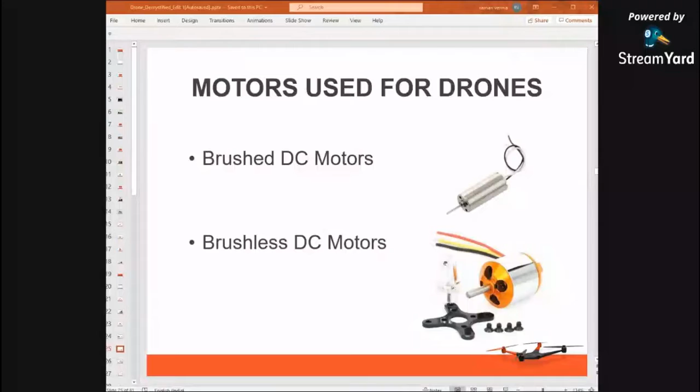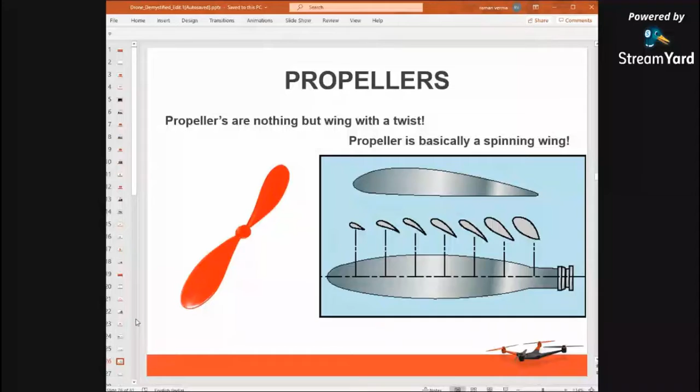Now we come to the propellers. Propellers are like a wing with a twist. Also, when we talk about the propellers, we have two numbers, for example, 5 cross 3. Most propeller diameters are described in inches. So when I say a 5 cross 3 propeller, that means 5 inches is the diameter of the propeller and 3 inches is the pitch of the propeller. So we have different propellers, foldable propellers as well as carbon fiber propellers.

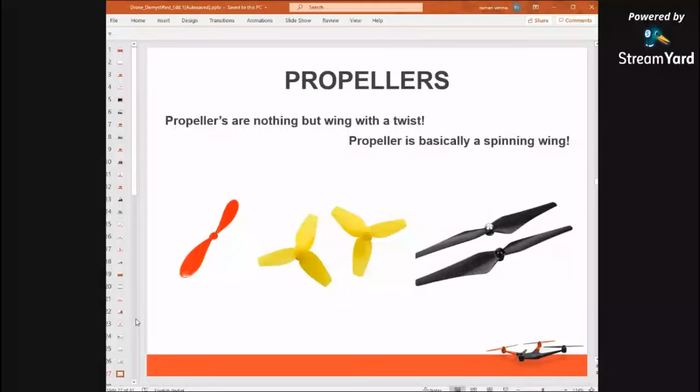Now we want to fly at a different altitude, different speed. So we need to control the motor RPM accordingly. That is taken care of by the electronic speed controller. Our brushless motors are basically an AC motor, and the electronic speed controller takes in the PWM signal and converts it into the necessary current for the motor to alter its RPM.

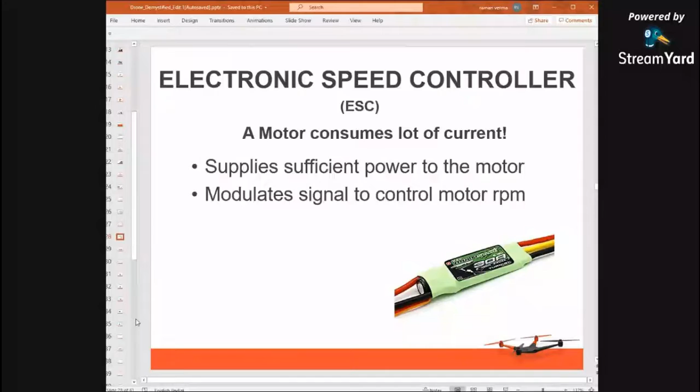Now we come to the powerhouse, the battery of the drone. The most common batteries that we use are the lithium polymer batteries because they can provide a higher discharge rating. The discharge rating of a lithium polymer battery varies from 20 C to a maximum of 120 or 150 C. The racing batteries reach up to 150 C of discharge.

If you want to fly for a longer duration of time, a new way of increasing the endurance is by increasing the voltage. If you increase the voltage, you can drop the current, and then you can use lithium ion batteries which have a low discharge rating.

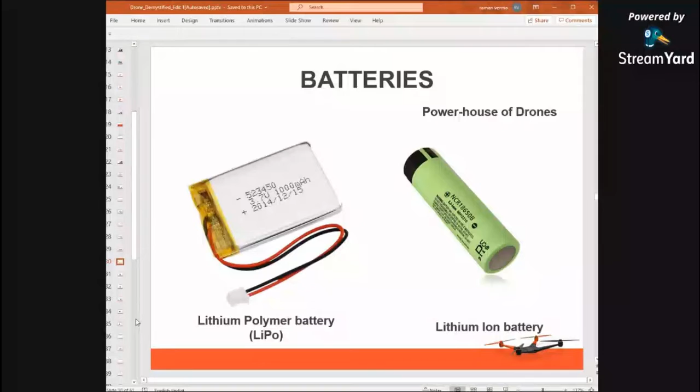Apart from the batteries, another latest introduction to the power system is the use of generators. Batteries cannot provide power equivalent to that of a generator. A generator is a small device that is mounted on the drone to give continuous power by converting the mechanical motion of an engine using a dynamo. Generators are used to increase the endurance for up to 3 hours. It has been shown significantly.

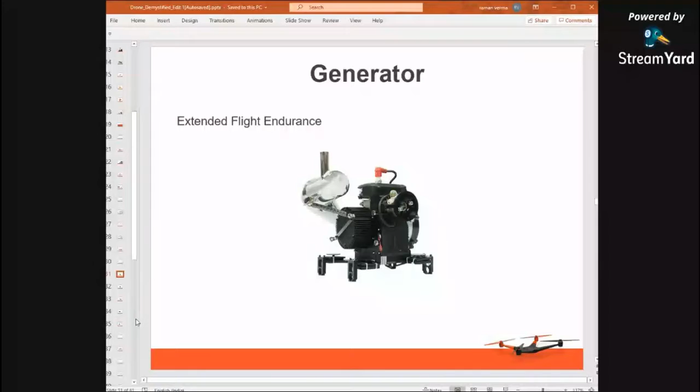A very latest introduction is the use of hydrogen fuel cells for drones, because the emission is totally clean and hydrogen you can produce at a much faster rate. Even at IIT Bombay, we are working on a similar prototype. You would have seen hydrogen fuel cell powered cars, and soon there will be hydrogen fuel cell powered air taxis.

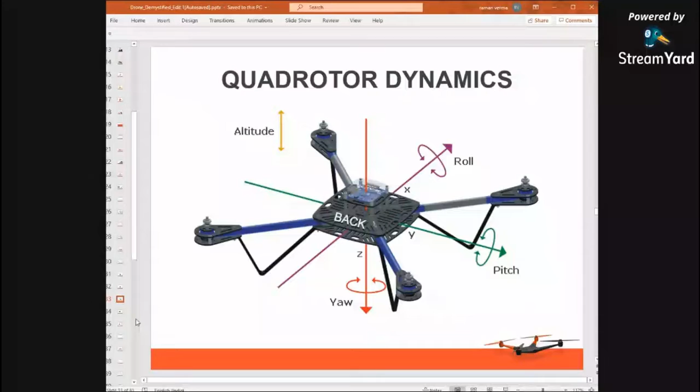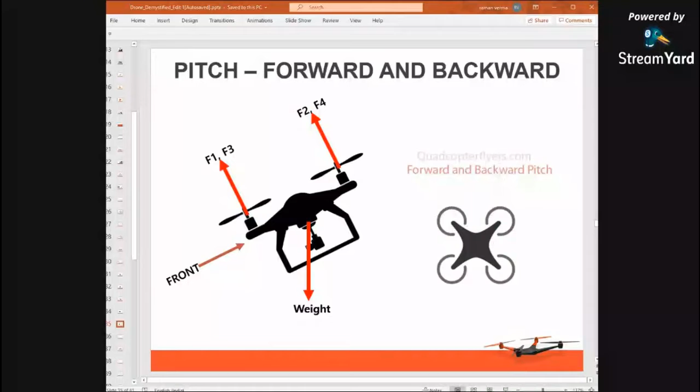Now, when we come to the quadcopter dynamics, we need to understand in an X configuration what is the roll, what is the yaw, and what is the pitch. Are you able to see the drone? This is the front side of the drone. So this is roll. This is pitch. And this is yaw.

Now, when you want to do a roll, basically you give the roll command on a joystick, on your radio. You get that signal, and the flight controller makes the changes. What changes? You increase the RPM of these two motors, so it will roll like this, and you decrease the RPM of these two motors by the same amount, so it will roll towards the right, and vice versa towards the left.

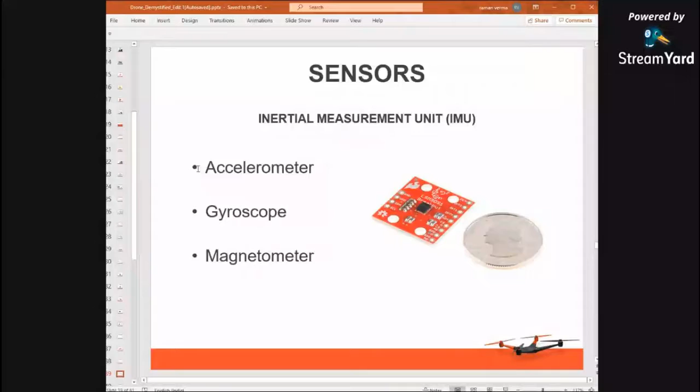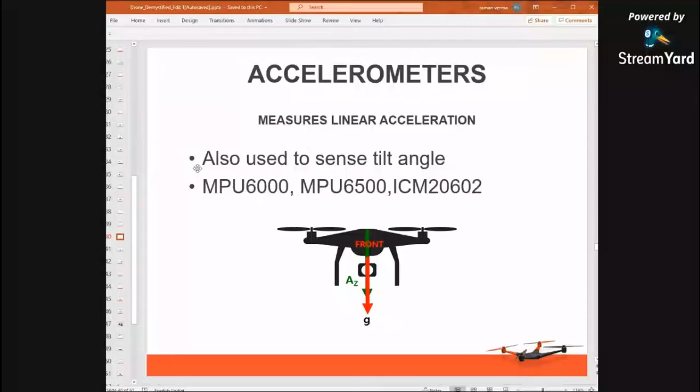Accelerometers are used to sense the tilt angle. The most common accelerometer and gyro chips are the MPU 6000, MPU 6500, and ICM 20602. A gyro measures angular velocity, and a magnetometer senses the drone orientation. A mag is generally used in waypoint navigation, where you want to know the orientation of the drone.

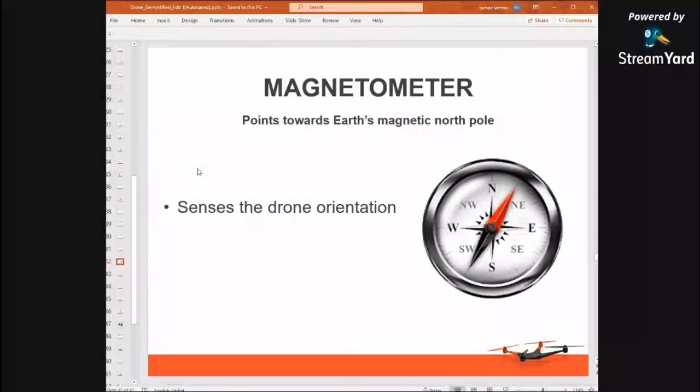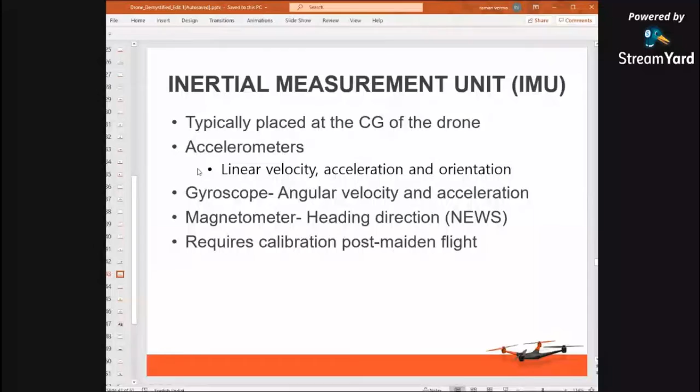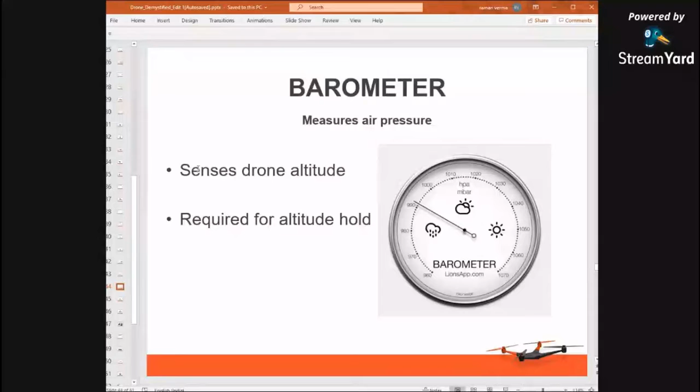Another important sensor that we have to use in a drone is a GPS. A GPS gives the latitude and the longitude of that particular position and is used for a GPS hold. That means the drone will stay at that particular place.

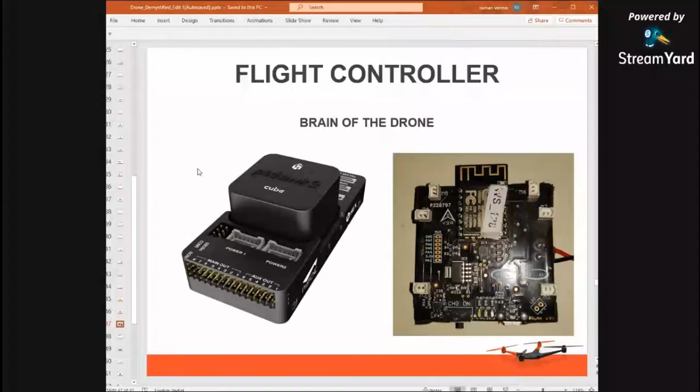A flight controller is basically the main system which takes in the user input, the signal from the radio, processes it, and gives output to the motors to alter their speed according to the requirement. So the flight controller is also used to stabilize the drone, to understand the signals as an autopilot, and also for obstacle avoidance.

So when we come to the basic components of a quadcopter, these are the motors. These are the propellers. So for a quadcopter, you will need 1, 2, 3, 4 motors, 4 propellers. You will need 1 flight controller, a 4-in-1 electronic speed controller, or it could be 4 separate electronic speed controllers.

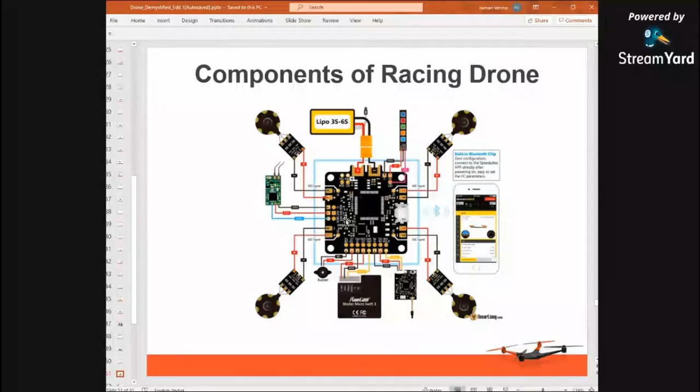And then you can combine those images, because the images are linked according to the latitude and longitude of that particular place. So the GPS coordinates are embedded into the images, and these images can be post-processed in OpenDroneMap software to generate the topography image and the layout of that particular area.

Another interesting application that has come up recently is because of the locust menace. One of my friend's companies is Hela Infratech. His name is Vipul Bhati, and he is currently using this drone to spray pesticides to kill the locusts. This process is still going on, and a lot of work is still to be completed. But thanks to him, we're able to deal with this problem.